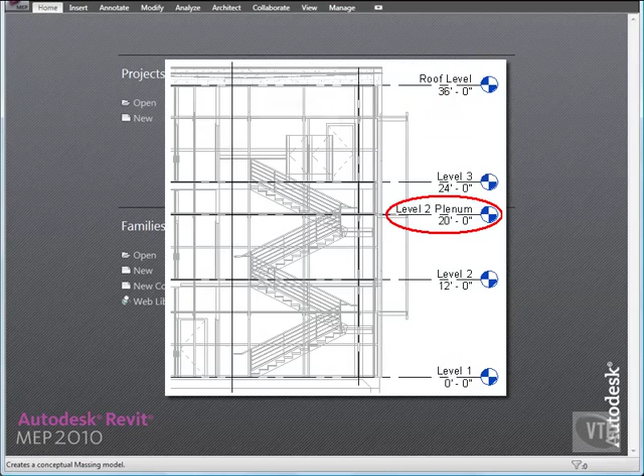Spaces allow you to calculate the volume of the areas in the building. They contain information about the locations in which they are placed. The information is used for heating and cooling loads analysis.

Click the menu browser and select Open. And in the Open dialog box, from the Training Files Imperial Mechanical Systems folder, open the file RME Mech Spaces 01.

Let's configure the linked model for space bounding in order to begin designing systems in it. In the project browser, with the Level 2 Space Plan view active, select the Linked Revit Model. Then, from the Element panel, click the Element Properties drop-down and select Type Properties.

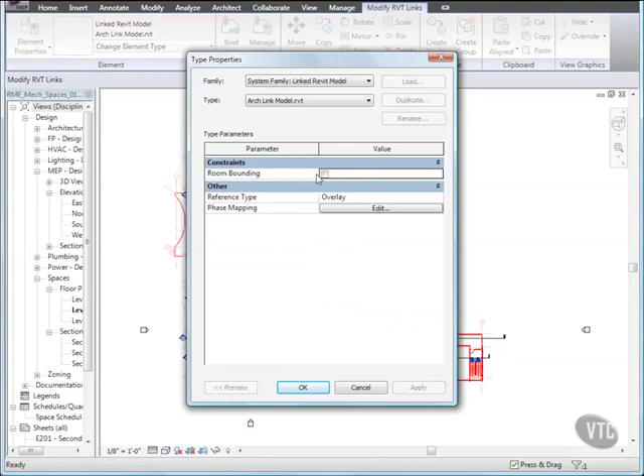In the Type Properties dialog, click inside the checkbox for Room Bounding and click OK. This makes the architectural components, such as walls, ceilings, and floors, recognized as boundaries for spaces. Press Escape to clear the selection, and next, we'll add a level for plenums.

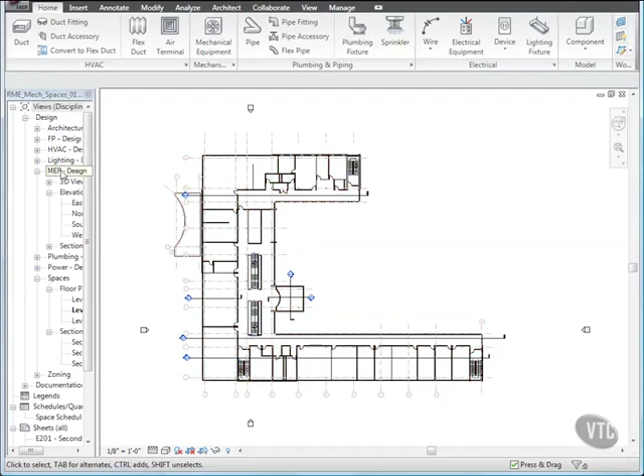In the project browser, under Design, MEP Design Elevations, double-click West MEP. Then, click the Architect tab, and from the Levels and Grids panel, click Level. Then, click the Change Element Type drop-down and select Level Plenum.

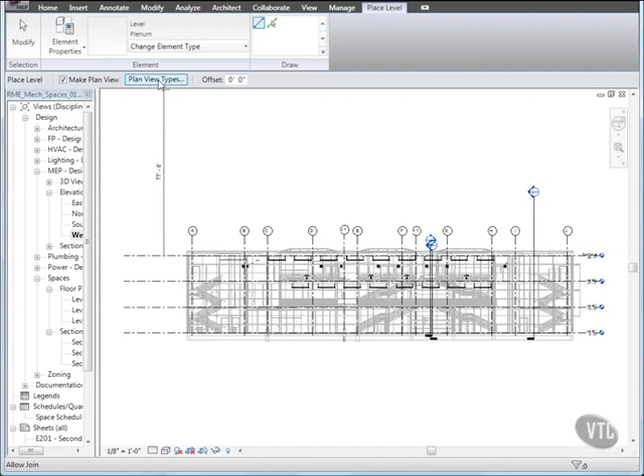Then, from the Draw panel, make sure Line is selected, and on the Options bar, verify that Make Plan View is selected, and click Plan View Types, and verify that only Floor Plan is selected, and click OK. This creates only a floor plan after the level is added. Then, for offset, enter 8 feet.

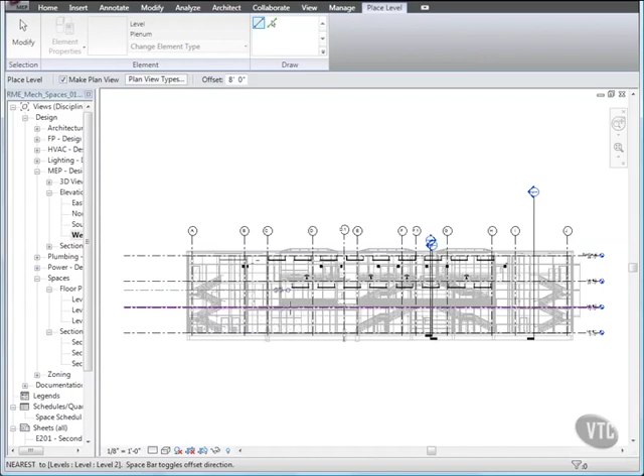Then, click the left endpoint of level 2, and then click the right endpoint of level 2. This draws a plenum level 8 feet above level 2. Click Modify, and zoom in on the right side of the elevation view. Then, double-click the level name Level 4, and enter Level 2 Plenum.

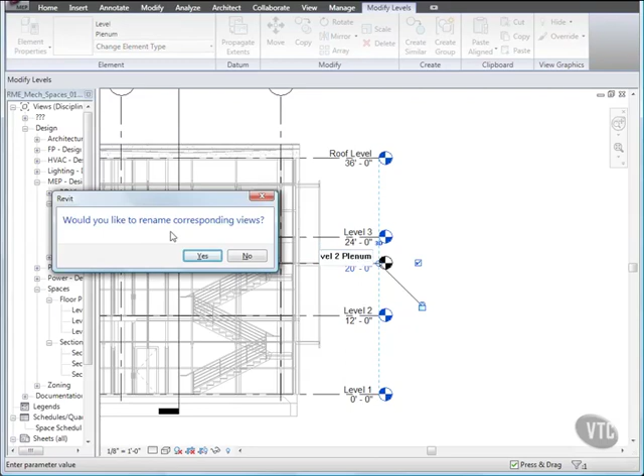When asked to rename the corresponding level views, click Yes. Then, press Escape to clear the selection. And note that you now have question marks under Discipline, followed by a set of question marks again. And under Floor Plans, you have a new Level 2 Plenum.

Because we have not yet specified the view classification or subdiscipline properties, those categories in the project browser are listed as question marks. Right-click the view Level 2 Plenum and click Properties. In the Instance Properties dialog, for Subdiscipline, select MEP Plenum. And for View Classification, select Design.

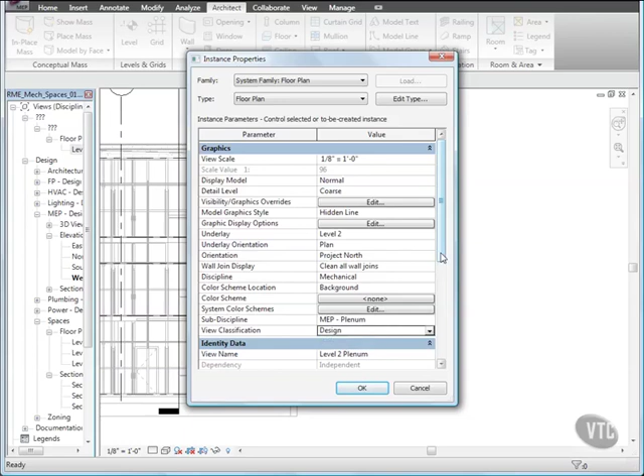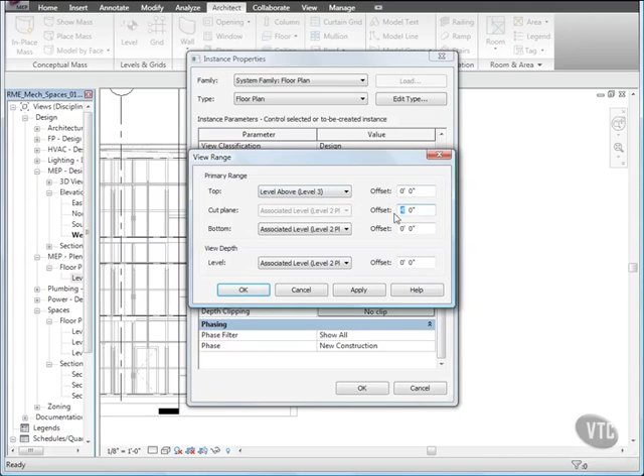And under Identity Data, for Default View Template, select Plenum Plan. And under Extents, for View Range, click Edit. In the View Range dialog, under Primary Range, for Top, select Level Above Level 3, and for Offset, enter 0, and for cut plane offset, enter 1 foot and click OK twice.

Now in the project browser, the view Level 2 Plenum is listed under MEP Plenum Floor Plans. Double-click the Level 2 Plenum view to open it. Notice that the site plan displays in the view. You'll now apply the default view template so that only the architectural floor plan displays.

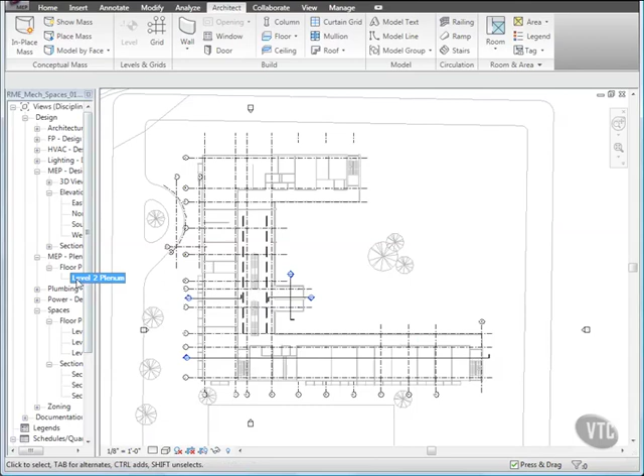Right-click the view in the project browser and click Apply Default View Template. When you do, the view graphics are modified based on the template applied. Close the file without saving it, as the next lesson will provide its own training file, and that concludes this lesson.